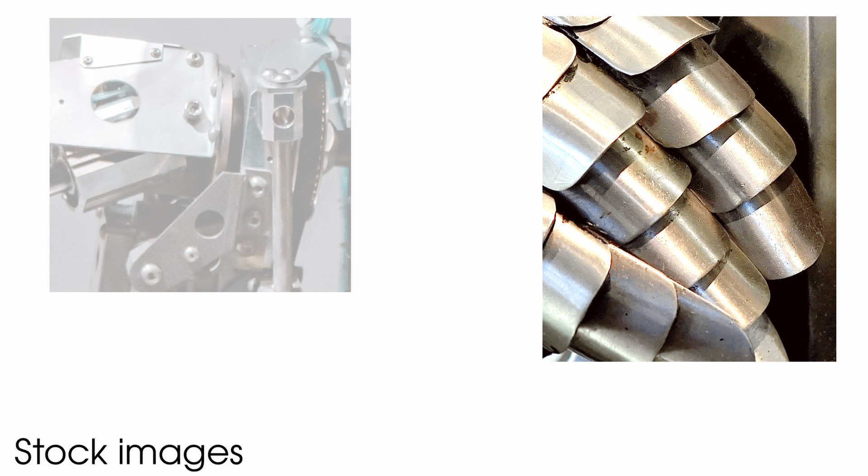The idea of MakerPunch is to make CNC cutting of sheet metal accessible. In this video, we are going to take a look at a really simple CAM pipeline for it. This was actually one of the first pieces of the whole MakerPunch project, just to see what it can do.

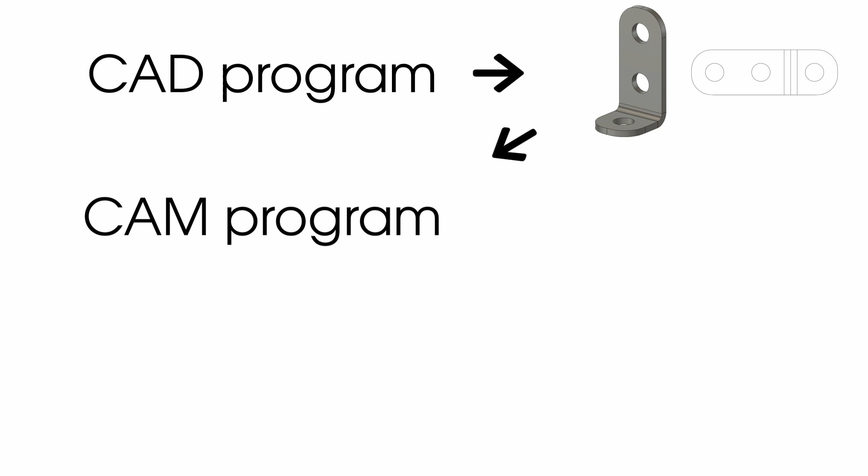Just to give you an overview of the whole process, we use a CAD program to create a model of the object we want to produce. A CAM program takes the model and produces G-code, which contains instructions like go there, punch a hole, go there, punch a hole, and so on. The actual MakerPunch is a machine that reads the G-code, executes it, and as an output you get a CNC cut piece of sheet metal, ready for bending.

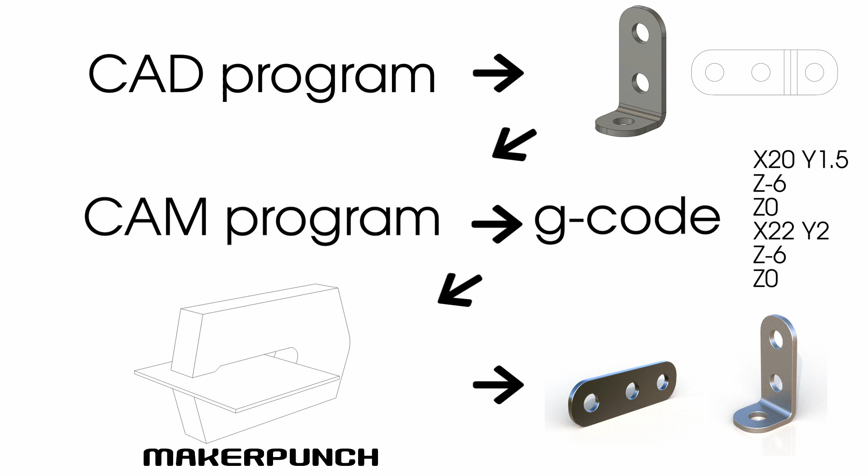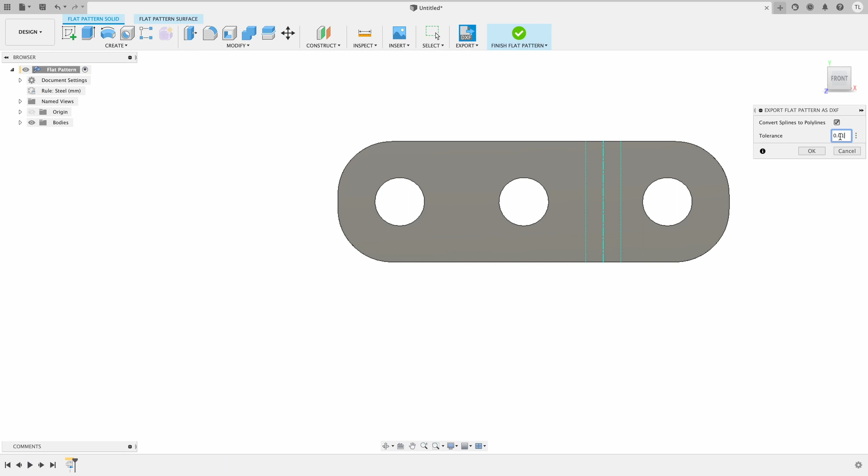So, before diving into the CAM, let's use CAD to quickly model a very simple bracket, just 3 screw holes and a right angle. Here. In the end, we go to the flat pattern mode to get the flattened out model of the bracket and export it into a DXF file. And we're done. The DXF contains the shape we would like to punch out of metal. Let's go build our custom CAM.

We are going to be working in JupyterLab, my go-to environment for hacking. For this video, I made the JupyterLab notebook a little more self-contained than usual. Normally some of the code would be in separate Python modules. Let's start with a license. The plan is to make all the MakerPunch software free and open source. AGPL 3.0 is the license, at least for the time being.

We start by importing some packages. We use ezdxf for reading the DXF we just made. Let's take a look at what's in the file. A bunch of objects of various types. Luckily, ezdxf now allows converting everything to line segments. For that, we write this backend that just stores all the line segments. Let's run it and take a look at what comes out.

There's our bracket. The plotting software matplotlib automatically colors each separate line so we see that everything is in small pieces. And it has also included the bend lines. We really don't want to punch along those lines, so let's remove them. I already included the code here and just commented it out, and there. This is what we want to punch.

But for that to happen, we have to go from line segments to a more holistic picture of the object we are punching. For example, you really want to punch outside the object boundaries, not inside. So the first step is to combine those line segments into polygons. This code just looks for line segments with the same endpoints and combines them into a polyline. And let's plot the result. And nice, the coloring has changed. Now each separate contour is one polyline.

Another thing that we can do with the holes is we can plot them in a different way. This is actually how I made the animation in a previous video. This is, of course, still a really simple and basic version, but I think this version is almost enough to make some fun and interesting project with the MakerPunch before it becomes the limiting factor. But we'll figure that out later.